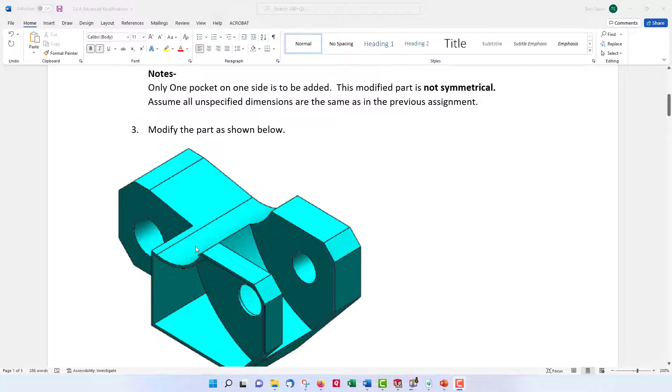So a couple of things to note here. First of all is the drawing. We're taking a part that we have already made and we're going to modify it. And what we're going to do is we're going to cut this pocket in it. In this pocket, it's kind of important to understand that it's not a symmetrical pocket. In other words, it's got different depths.

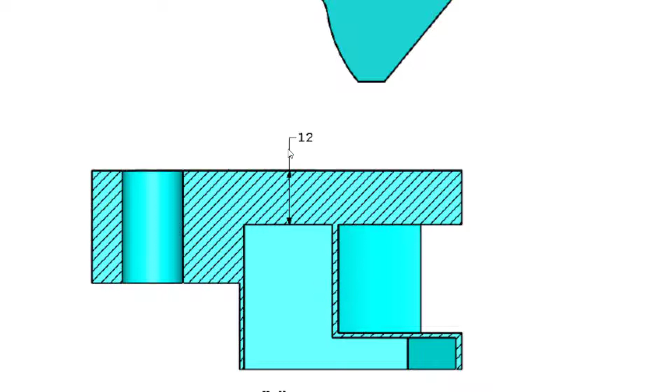So if you look through the drawings, you'll see that it's got a 1 millimeter shell that goes around the outside. And it also has a 1 millimeter depth shell that extends back 12 millimeters off of the back. So you see it's kind of this L-shaped pocket that's cut out. So we're going to do that with a series of 2 cuts.

It's pretty straightforward. First thing I want you to do is I want you to go ahead and download the part from the previous exercise that I've uploaded into the LMS and open that. That'll help you all to start from the same place. So let's get that going. So here I've downloaded and I've opened up this part. It's called 2.2.4_Sample. And we're going to make our cut on this face right here.

Now, what we need to do is we need to do a sketch on that face. I'll go ahead and start this sketch. I'll start it by commanding an extruded cut because I know that's what I'm going to do. Now, what I really want to do is I want to gather the edges of this, but I want to offset them in 1 millimeter. So this tool right here, Offset Entities, is what you'll use.

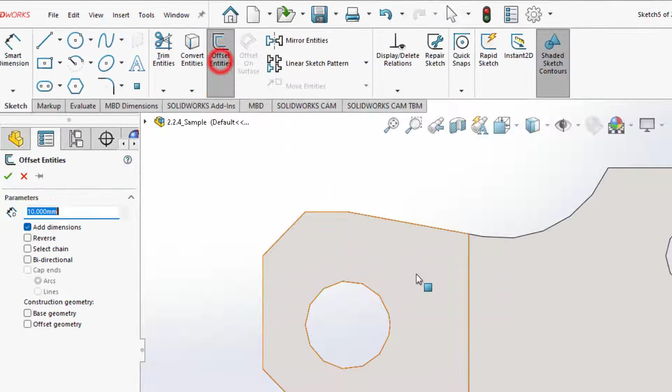Click on that. Now, I can either select the individual lines as I work my way around, and you'll see in this instance it's set at 10 millimeters, which is crazy big. I can reverse the direction inside or out, and I'm going to make it 1 millimeter. Now you see it looks a little bit better. Now that's one way to pick these edges. I can go around and pick them and select or deselect.

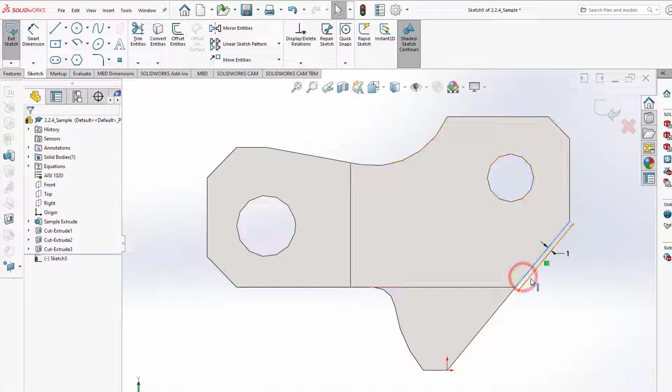I can also choose an entire face if I so desire. So I don't really want that. So I'm going to go Offset Entities, 1 millimeter, and I'll just click on the face. Now you'll see it offset to the outside. I can reverse directions just by clicking. That's as hard as it gets. I have just made a fully defined sketch.

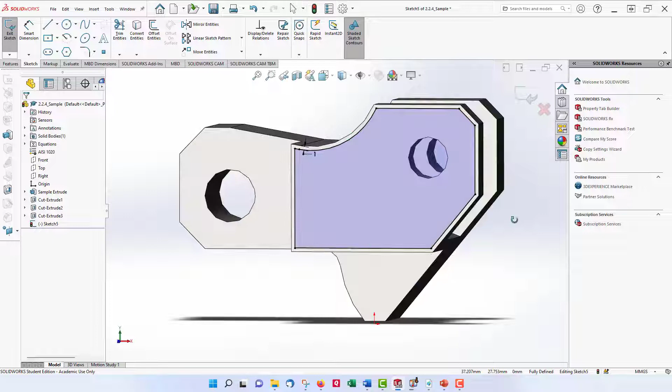And what that fully defined sketch will allow me to do is it'll allow me to cut a 1 millimeter lip around this outer edge. Now the first step of this cut is offset from the back surface where my cursor is flashing by 1 millimeter. So I'll go ahead and exit that sketch and move into my extruded cut. Instead of using a blind extruded cut, I want to go and offset from surface.

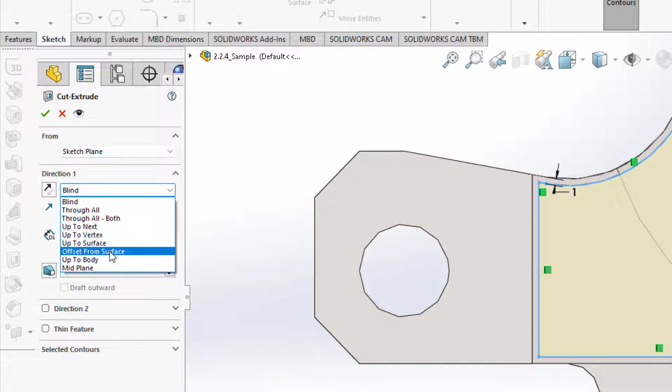Roll my part over, choose this back side of the pocket as my surface, and I want to offset from that 1 millimeter. Check it, be sure it looks correct. It does, and accept it. Done my very first cut. Now, we're going to do a similar cut to make the next part of the pocket.

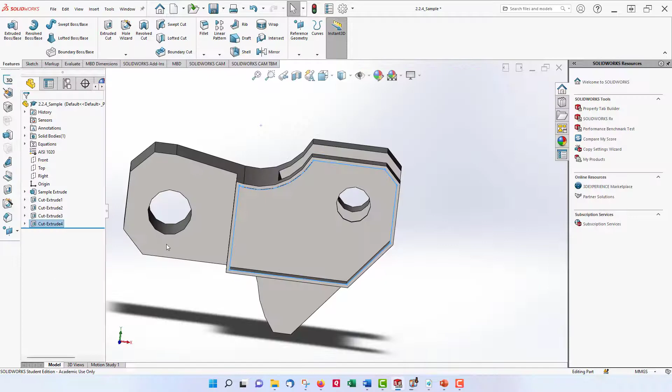So this next part of the pocket is right here, and it goes all the way in deep up to 12 millimeters back from the back of the part. So let's go ahead and make that cut. So on this cut, what I need to do is I need to convert some entities. So I'm going to use these same lines right here, and I'm going to convert them. So I'm going to make a second cut. The sketch will be on the surface where I just cut.

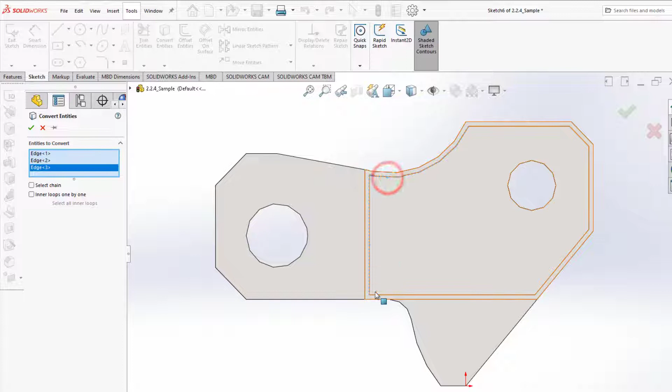And now I'm going to do a combination. I'm going to convert the entities for the first part of this arc going around. So I've got these lines put in. Now the next line I need to do is I need to do an offset entity from this arc line. And I can roll the part over and click on Offset Entities and then choose that line. Now I want that offset to be 1 millimeter and I want it to be inside of the cut line. And that's exactly what that does.

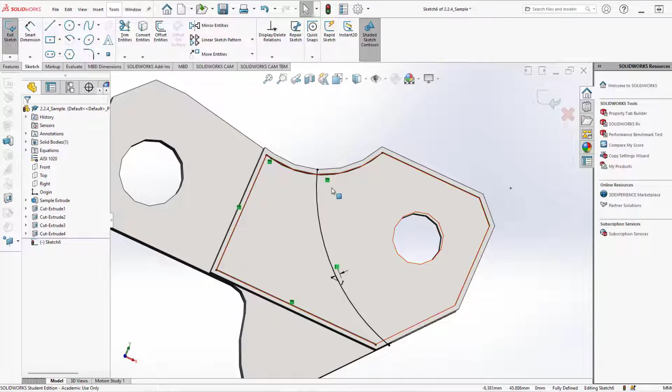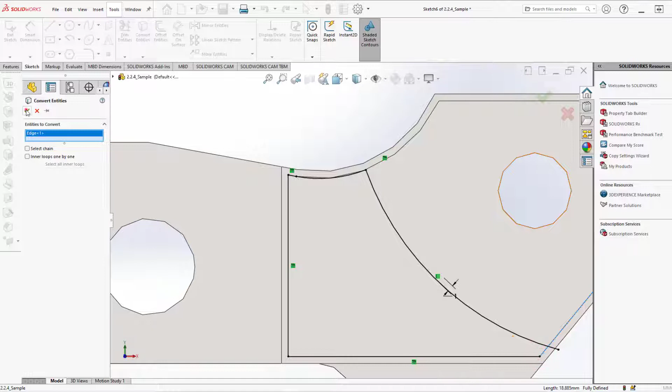Now you're going to see when I do this that I get some extra lines here. So I'm going to go ahead and look straight down on my sketch, choose my trim entities, and trim away any excess material. Now you'll see, oops, just made a mistake here. Let me undo that. You'll see that I missed a line here. So I want to go ahead and convert that line also. Now I can trim away. And I get my closed body.

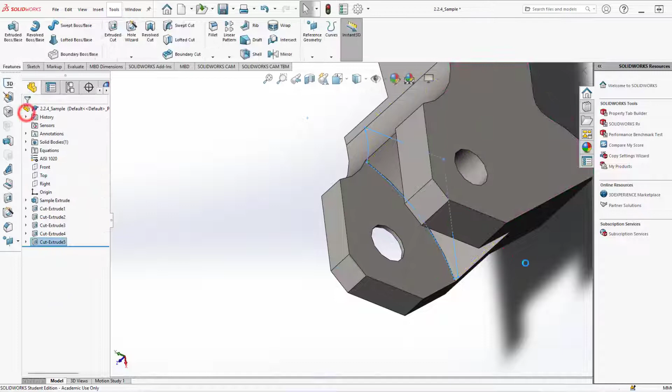So there's my cut. Exit this sketch, and now I'm going to cut this offset from a surface, choose my back surface, and I'm going to go 12 millimeters offset from that. Once I've got that cut, I'm now ready to evaluate my model. So you'll notice none of my other parameters changed. Everything else stayed the same from the prior part. So this is really a quick modification of the part.

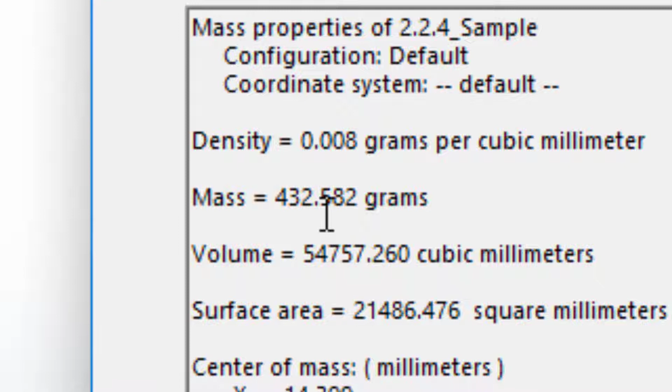Come in here to go to Evaluate, Mass Properties, check my mass properties, and you ought to get exactly 432.58. I've got 3 digits, so I get 582. That's all there is to making this part.